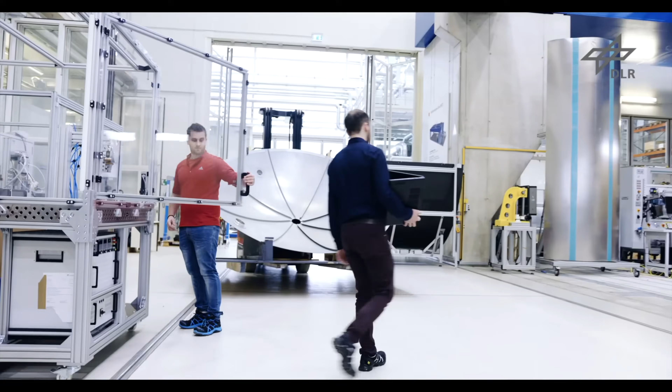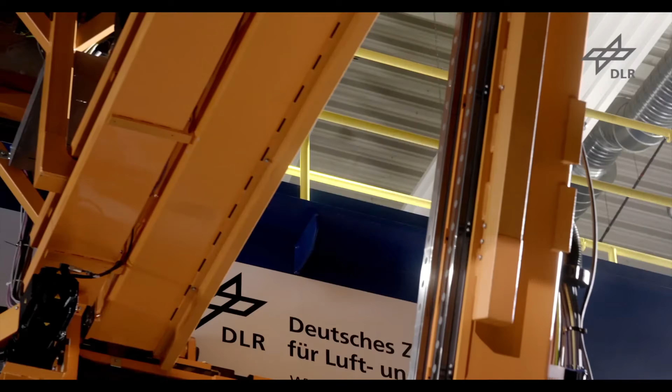The German Aerospace Center researches various topics in modern aviation, including manufacturing technologies and processes. The Center for Lightweight Production Technology in Augsburg cooperates closely with industry in several projects for effective and highly digitalized manufacturing processes. In Project Agreed, Premium Aerotec, DLR and partners developed and investigated a fully digital supported assembly cell for large aircraft fuselage shells.

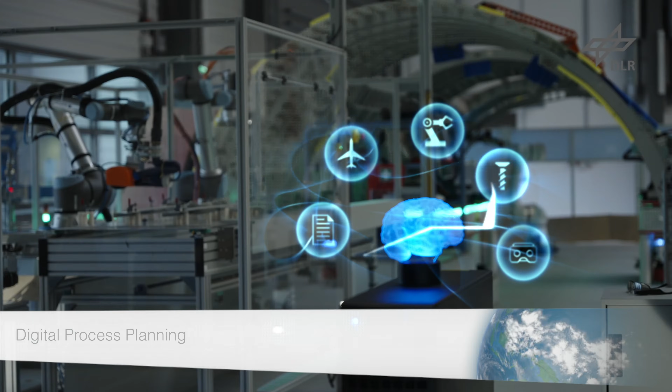When starting the work process, a central computing unit calculates the most efficient working order for a number of upcoming processes, taking the work plan, status of the station, workers and robotic system into account. All inputs and resources are prepared, and planning status of shell manufacturing is provided online.

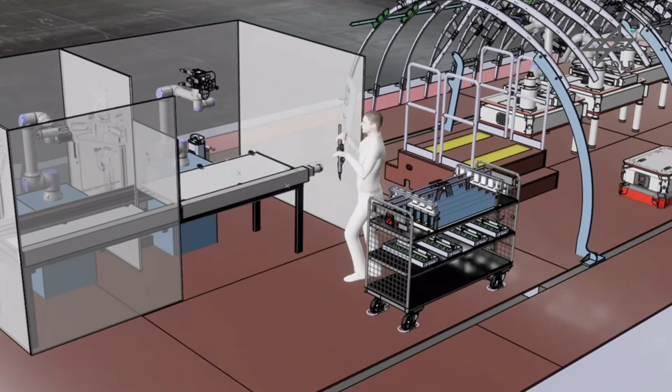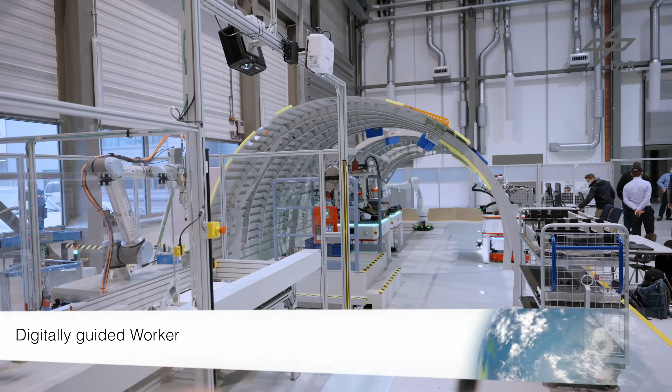A digital model of the station and all resources leads to a digital model to approve the current setup. When starting the process, all resources, including workers, are connected and guided online in the following tasks. The parts to be integrated have to be prepared by local cleaning and activation by automatic processes.

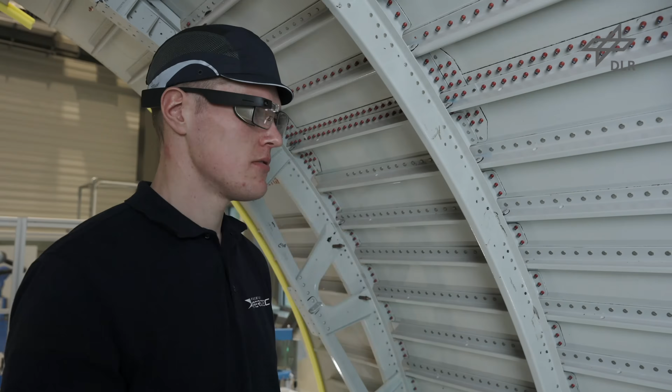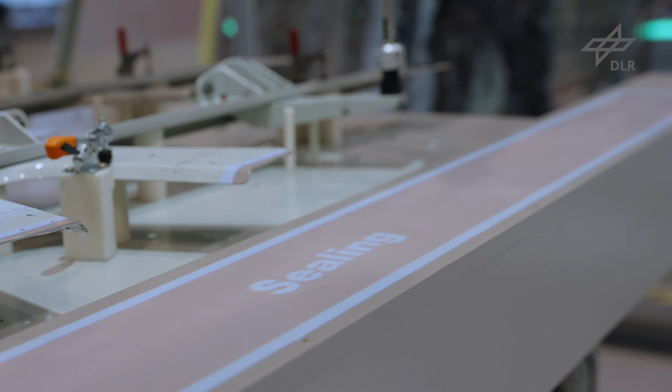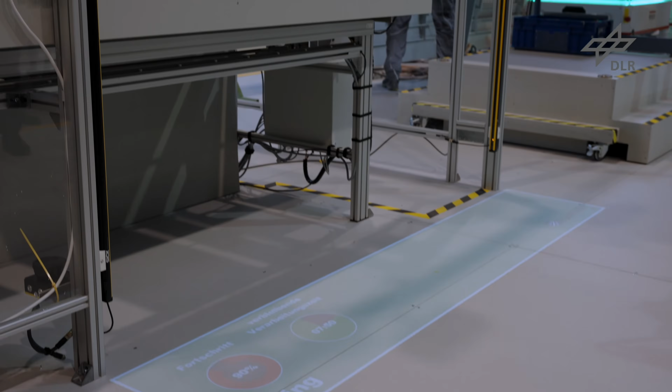The two processes of cleaning and following activation are realized by fully automatic change of end effector. Now the workpiece is well prepared for the following sealing process. The work order and timing is fully computed and digitally transferred to man and machine.

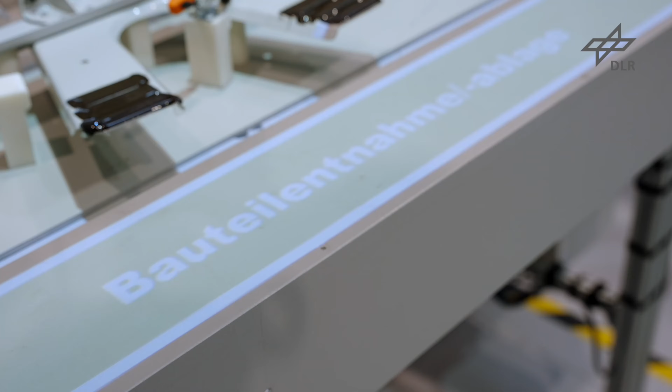Robots with integrated sensors lead to safe and collaborative interaction. While the digitally guided worker is fixing the part manually, cooperating robots are processing the next steps. Optimized drilling by just one shot without manual deburring is established.

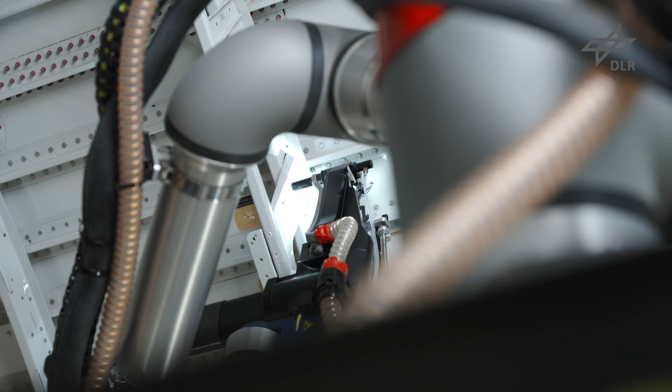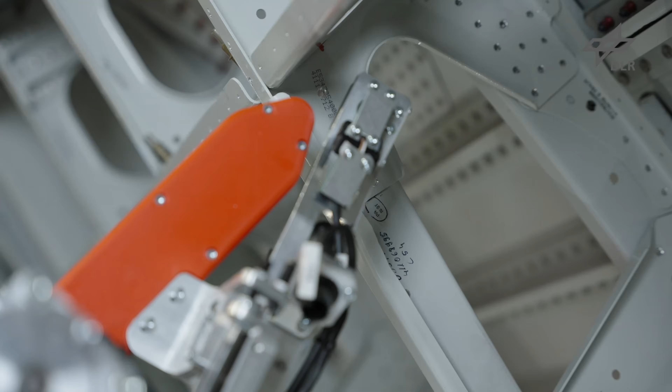By use of a C-clamp EDU, the part is fixed to ensure a highly defined gap and burrless connection. For positioning, laser scanners and cameras are used. The next step in the assembly process chain is the riveting. Again, robots with a sensor guiding system find the position and install fasteners.

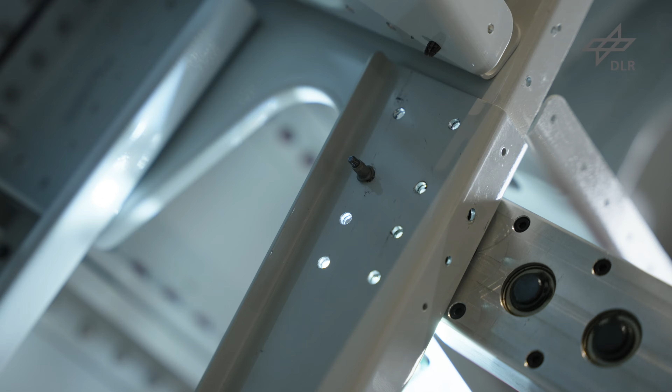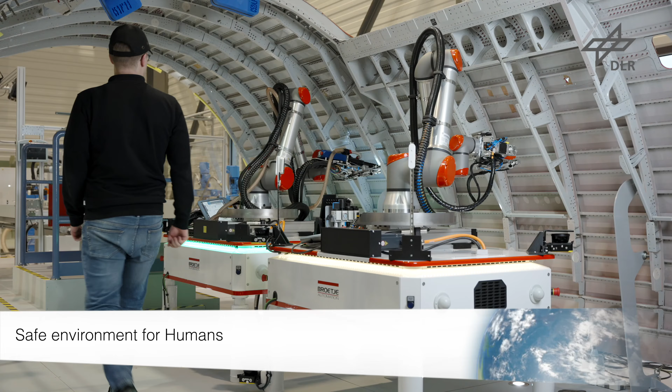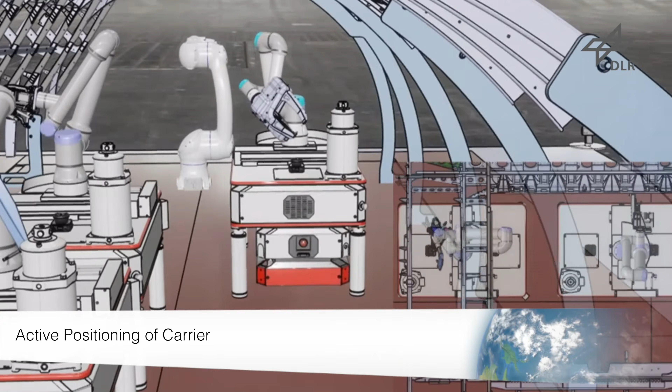Safe cooperating robots, so-called cobots, allow the coexistence of man and machine in the same area. All cobots are installed on movable carriers to be flexible for operation whenever it is needed. By digital simulation and planning, an optimum of shared workload can be reached. AGVs allow the motion of the carriers.

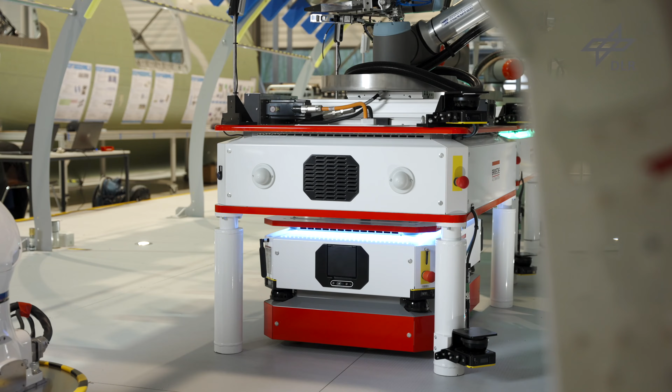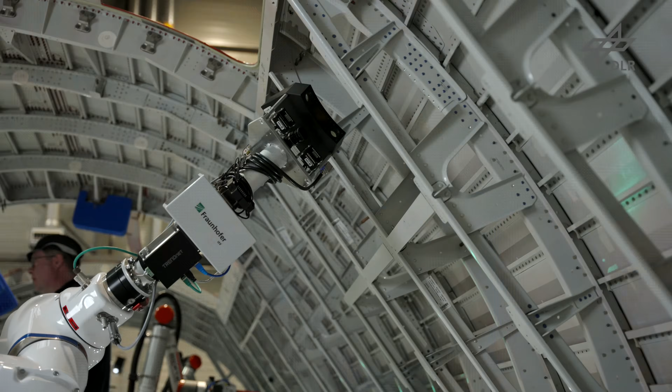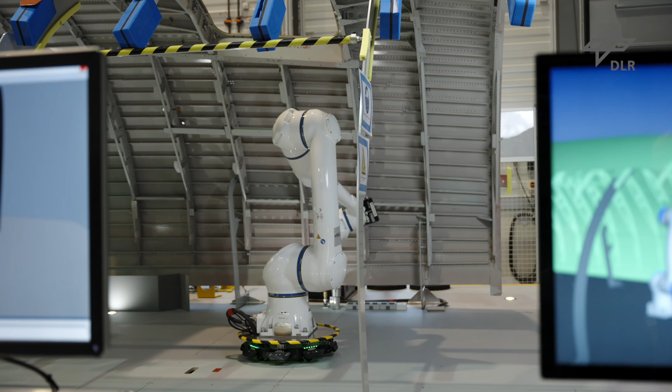The final step is quality check, an essential task for every aircraft manufacturing process. A robot-guided camera system is visually checking all assembled aircraft systems and compares them with the master model. By this digital assistance, the requirements are met in a secure, efficient and fast way, ensuring gapless documentation of quality.

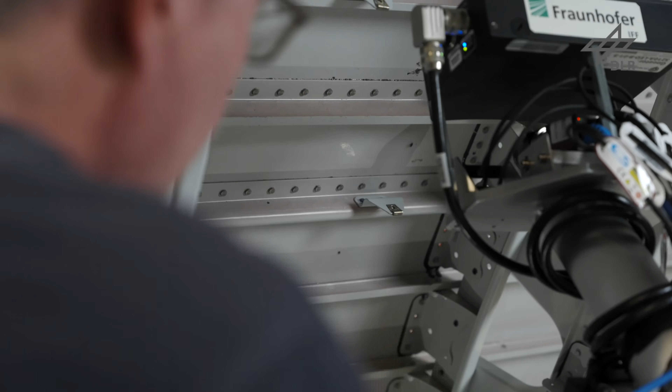The worker guides the system and takes the final responsibility for quality. His physical presence, very close to the robot, is made possible by the sensors of the cooperating robot. Aircraft part, station, robot and human workers have been modeled by a digital twin with their characteristic key features. All process steps were set up and demonstrated in a full-scale assembly station.